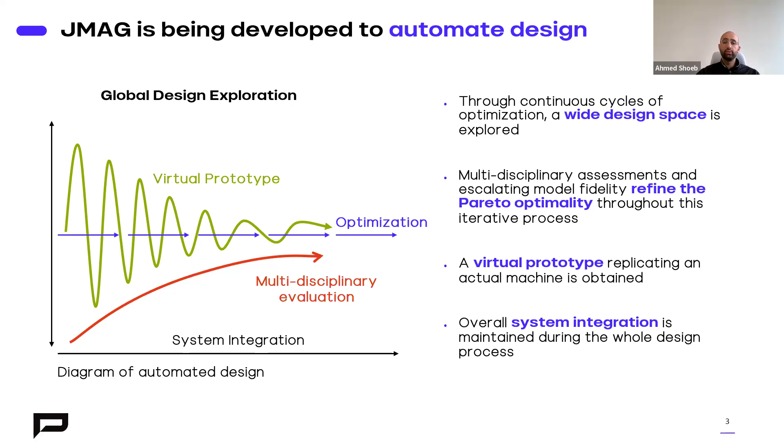So a quick agenda on our updates for this version. First, I'm going to go into global design exploration and optimization features. Then there's multidisciplinary evaluation, virtual prototyping, system integration, some new materials that we've added to our material database, and then in the very end, some related documentation.

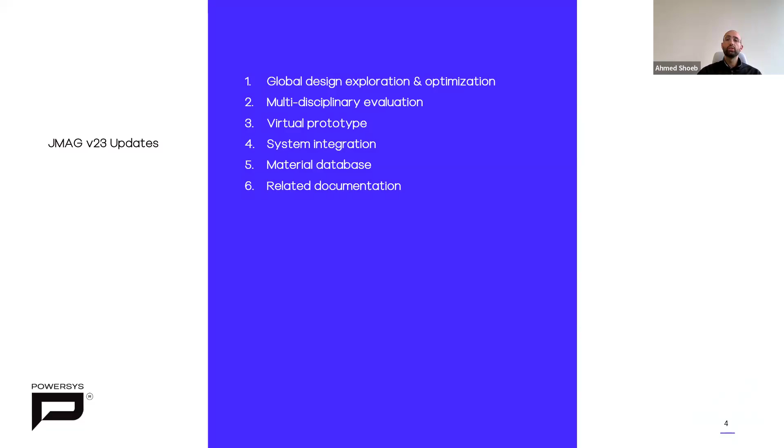All right, getting into it. First, we're going to discuss the distributed processing of parametric optimization. The idea here is that we're optimizing each case by itself, and that we're using a metric called distribution efficiency, which basically means how many cases are being distributed at the same time, and we're looking at the processing time per case.

Our goal here, let me add a laser pointer. Our goal here is basically to push each simulation as fast as possible from the right side to the left side. And we can see that that has already happened between version 22.2 and version 23. So the idea is that you're improving the distribution efficiency of each case so that 100 cases are calculated simultaneously.

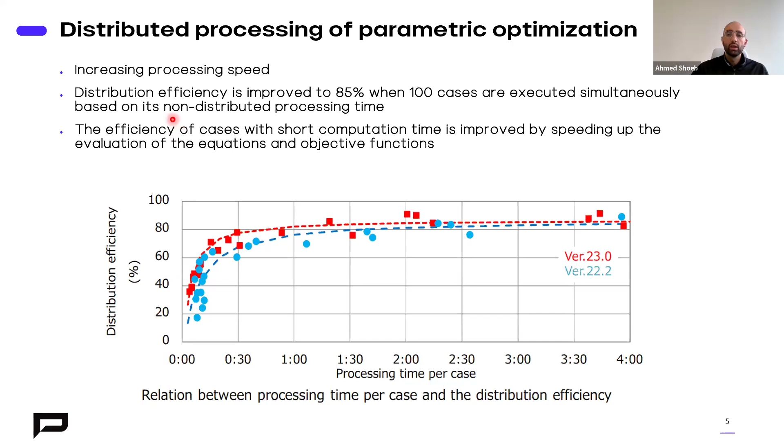Then moving on to the next feature, which was the parametric analysis with large number of simultaneous jobs. We've optimized the file input output. So there was a bottleneck in the disk loading, and that has been optimized for better performance. Ideally, of course, it's going to look like this, which doesn't happen. This is basically due to the Windows reading and writing.

And we've seen that between version 23 and version 22.2, there's a significant increase in speed, especially when the number of simultaneous cases increases. And this translates to up to 600 times speed up. So as you can see here, we're going into larger and larger number of cases, not just 10, 20, 30. We're looking at the 600, 800 range, 1,000 range at the same time.

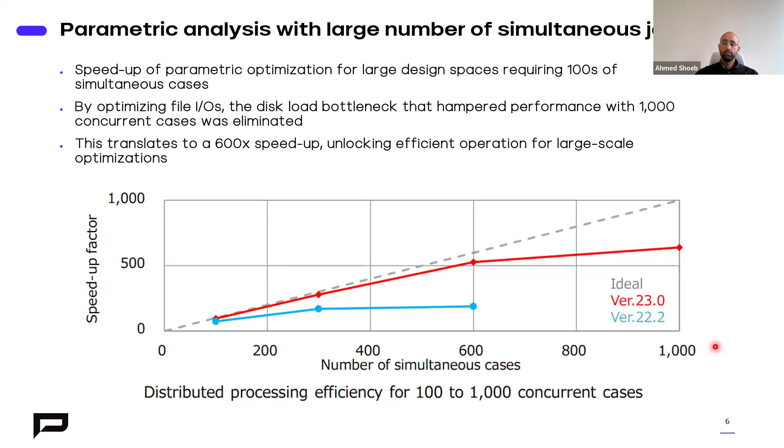Then for the magnetic field analysis solver, this has also been optimized with each version. This has been happening for several years now. For small scale models of 5,000 elements or less with 33 time steps, we're comparing the result of version 23 and version 22. And as you can see here through the graph, it's getting a bit faster.

The average computation time was reduced by 0.2 seconds, which of course doesn't sound that much. But when you take into account that you're calculating 100,000 cases, that number quickly adds up.

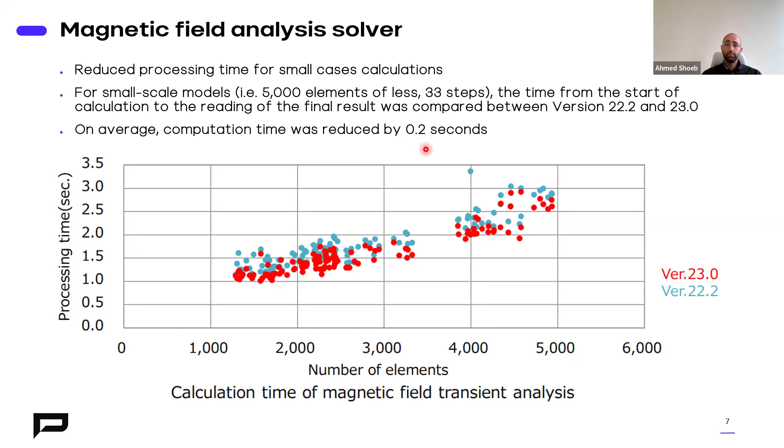Then we've also added optimization with a surrogate model, which basically what it does is that after several generations, it creates a surrogate model, and that sort of steers the direction of the optimization. So the idea of the surrogate model is to omit some of the FEA calculations. So in a 20 generation optimization, an FEA can be run every 4 generations instead of every generation, and that saves you a lot of time.

And as you can see here through this graph, the time in hours, if you're skipping every 2 generations, every 4 generations, you're seeing that the results are quite similar to each other. Every 10 generations might have been off a bit, so we stay at the 2 or 4 range. And if we don't skip, it's more than 4. It's, I think, around 5 hours over here. Here it's around 2.5 hours. And here it's less than 2 hours, or maybe 1.5 even.

So the surrogate model will help you, especially if you're thinking of going into 3D optimization. That will be your stepping stone.

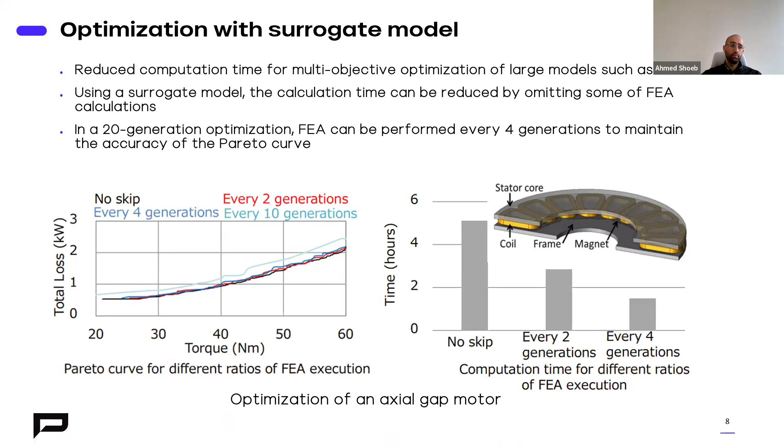And then JMAG-Express has also been a bit modified through the previous few versions. A lot of work has been done on JMAG-Express. It's been an extension to JMAG-Designer right now. It's complete FEA. It's not even analytic in any sense, but it's so fast because it uses very small meshes with a few number of time steps, just to calculate everything as accurately and as fast as possible.

And in this scenario, what is happening is that after running the machine characteristics design scenario, which is the efficiency map in Express, the cooling is also evaluated, and then additionally a torque ripple scenario is being added to increase the level of detail. And all of these will of course be added. These added scenarios would then be usable in Designer as well.

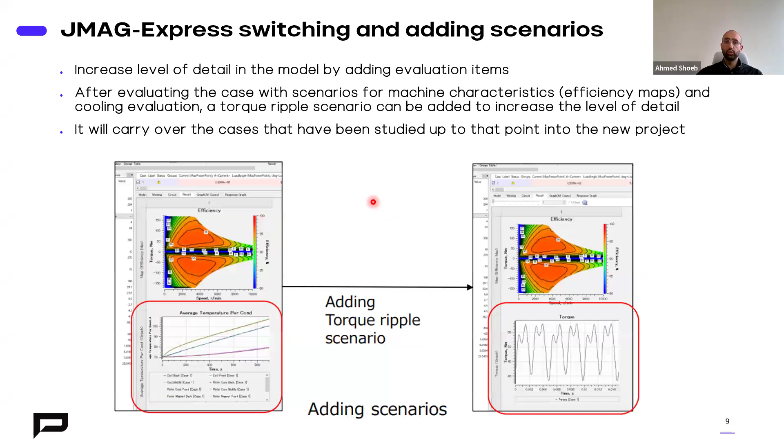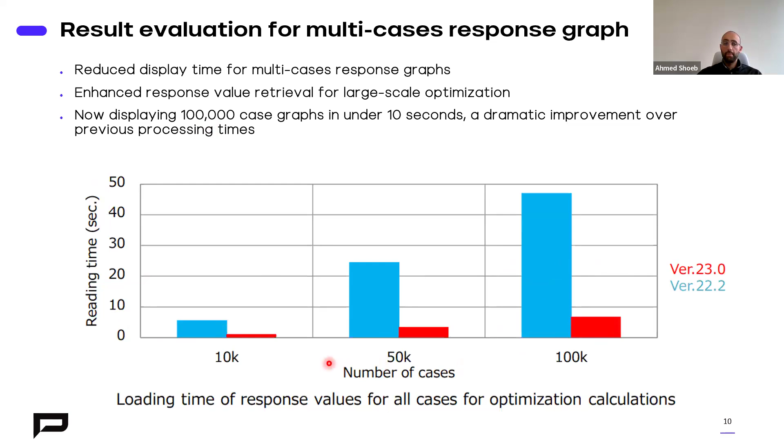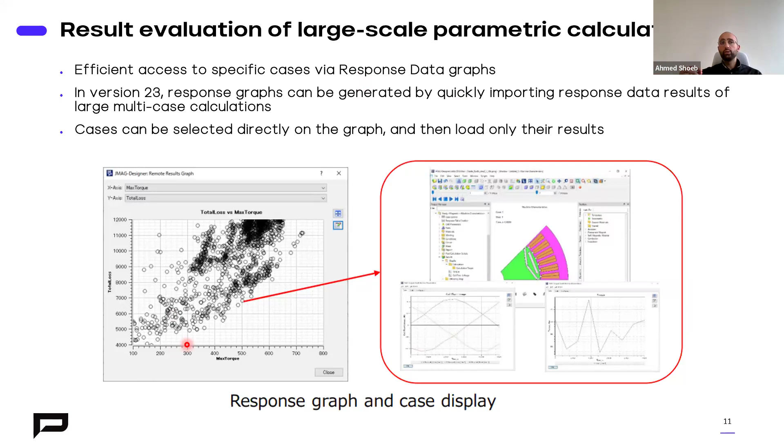Then also, this is applicable in Express, where you have an efficient access to response data graphs. Basically, instead of loading all the cases, you're just reading the response data and you're getting the table out of it, and you can then select the cases that you actually want to look at. Because of course, when you're doing this massive exploration, not all cases are of interest, but over time, you might hone in on the one you need.

And then this is a quality of life feature. It's the JMAG-Express scaling. Basically, if you set the gap type as fixed, when you're changing the size of the outer diameter, everything is going to scale with it. Previously, you would scale it and then your air gap would be like 10 millimeters. So if you keep the air gap fixed, JMAG is going to scale everything to that size.

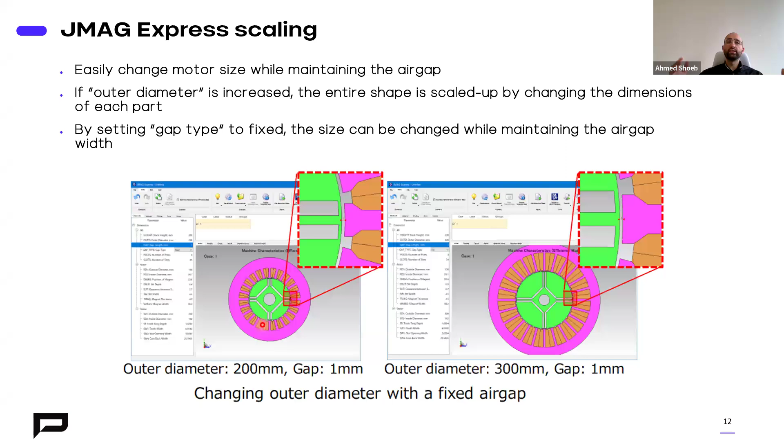And then moving on to the next topic, which is multidisciplinary evaluation. So version 23 expands the available scenarios, and machine topology is not just PMSM, there's induction motor, there's wound field synchronous machine as well. And it's been made easier to import DXF files as templates for JMAG-Express.

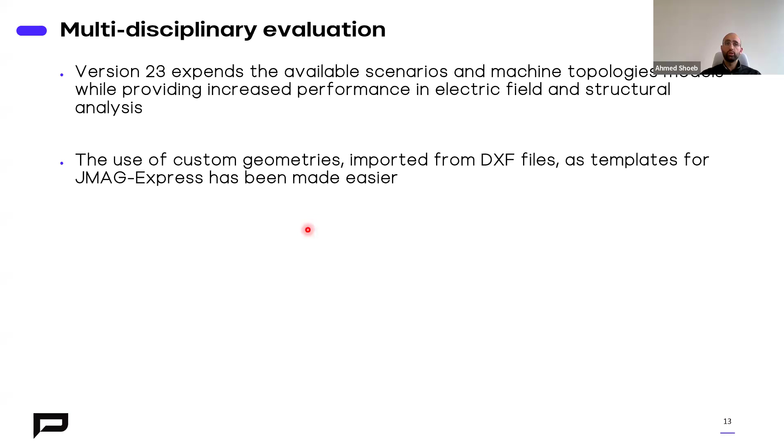So of course, we've added the wound field synchronous machine scenario, so you can evaluate the efficiency map, the thermal evaluation, and do a stress calculation as well. All these three scenarios are available for the wound field synchronous machine. In this scenario over here, we've noticed that the field coil temperature is too high, so we need to reevaluate our design. And this is the advantage of JMAG-Express, is that it can give you a very broad overview. Even if this is mechanically sound, it might not be thermally sound.

And even also if the efficiency map is what we are expecting, we need to evaluate all three scenarios at the same time, just so that we have a full picture of what is going to happen, and decrease the back and forth of, we've designed this, it's very structurally sound EM wise, but then thermally it does not meet our expectations or our criteria.

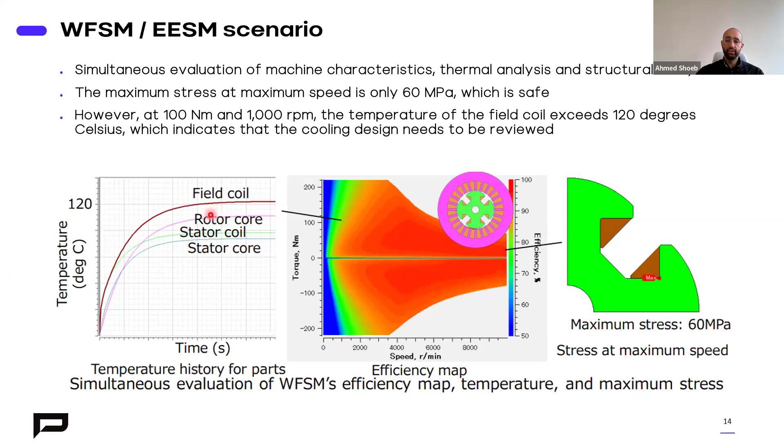Additionally, you can evaluate inductances in efficiency map, and these inductances can be used as response data, and that can be also set as an objective function or a constraint. So you can control the inductance of your machine, or optimize to a certain inductance value.

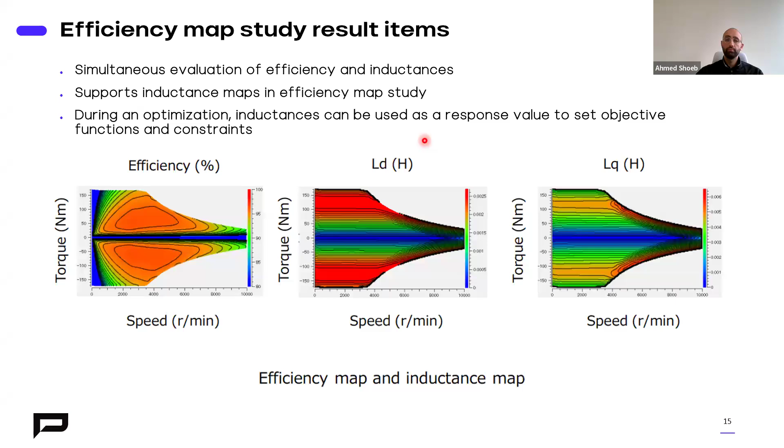And then we've increased the speed of the electric field analysis, where here we're evaluating cases with a large number of conductors. And basically, the time is reduced about 1 second between version 22 and 23. Again, this number does sound very small, but if we look at the grander scale of things, where we're mainly focusing on 100,000 simulations, 200,000 simulations, even more, each second adds up, and we're optimizing for that. And as you can see here, each version 23 has better results or has less processing time compared to version 22.

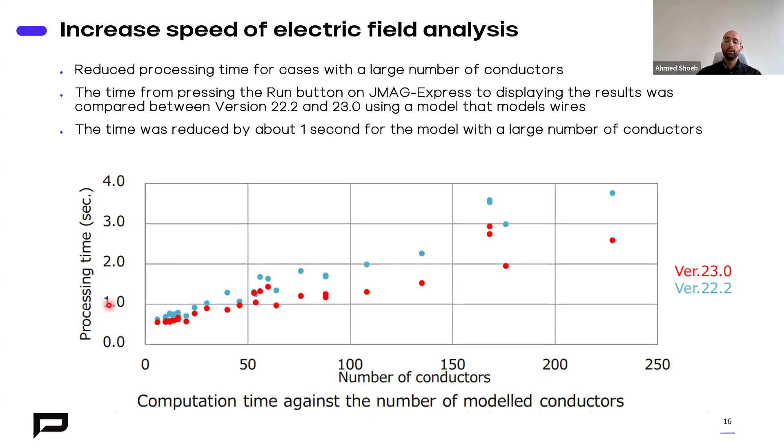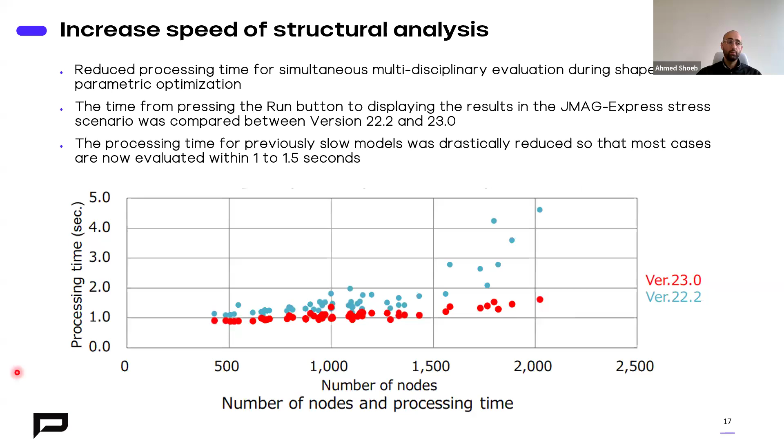And then we've added a feature where you can easily add your custom geometry as a template. You load the DXF file and you follow a setting guide. There's a tutorial for this, of course. And then you can use this geometry as a geometry template afterwards. And it can be used in JMAG-Express to evaluate the efficiency map, temperature increase, or the thermal scenario, and the stress scenario as well.

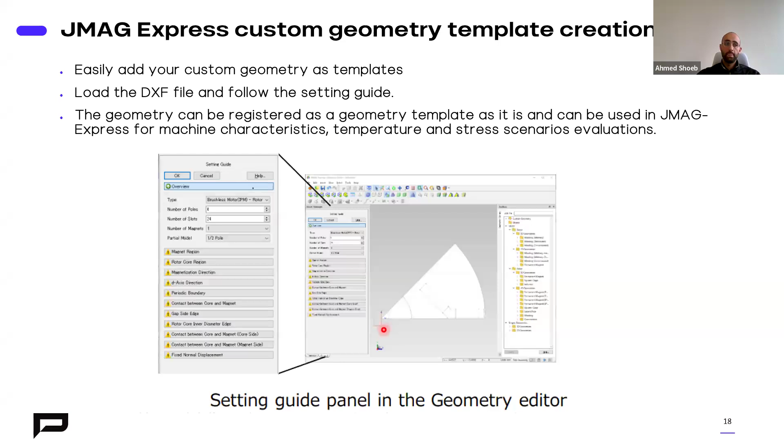Moving on to the next topic, which is virtual prototyping. So for virtual prototyping, we are expecting to handle very large, very detailed 3D models. And we're expecting the size of the models to significantly mirror what is happening in real life. So it might not just be the motor side of it, it can also be the casing to include all the leakage effects, all the stray losses that may happen.

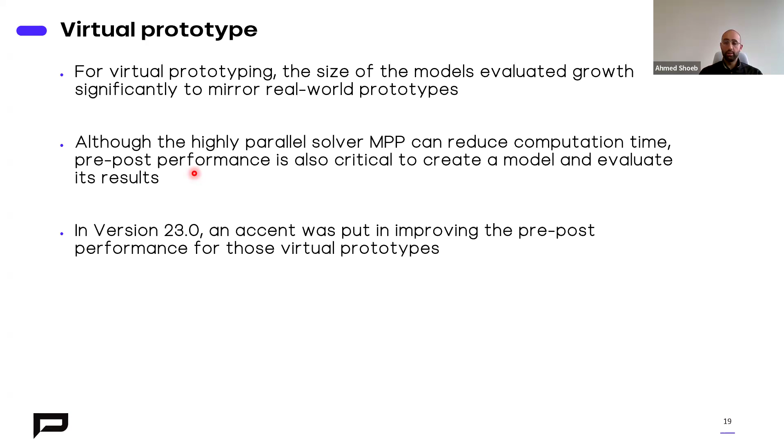Although the MPP solver can reduce your computation time, and as you might know, we can go up to 2048 cores in parallel at the same time for solving, there's also the problem of pre-processing and post-processing. So actually handling that model within JMAG. And we've noticed in some cases where even if the client wants to create a big model, sometimes the processing within JMAG is not helping him. And that has been improved in version 23.

If we look here, we have a graph of the number of million elements and the speed up factor. And basically what is happening is that there's a performance of models with 10 to 20 million elements, and the processing speed has been improved for improved usability. And the focus is on models with more than 10 million elements.

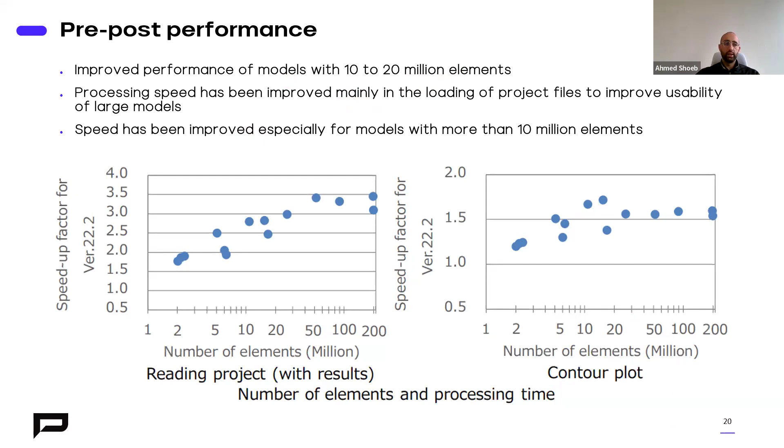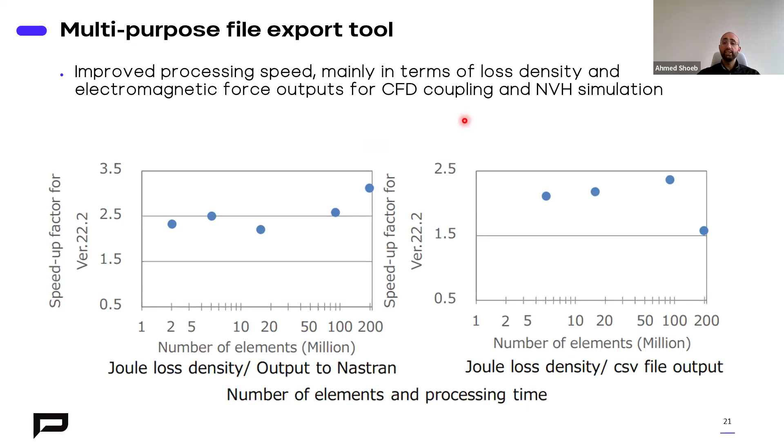Similarly, for the multi-purpose file export tool, we know that when you're outputting your files to a CFD software or for NVH simulation, you're usually using very big models. And for the multi-purpose file export, there have been improvements in speed for cases with large number of elements.

Then for our next topic, which is system integration. So maintaining system integration basically means that you have an early NVH estimate and a thermal assessment. So version 23 bridges that gap by adding NVH analysis as well as enabling that the data can be easily transferred to system-level simulation software such as Simulink or MATLAB, for example.

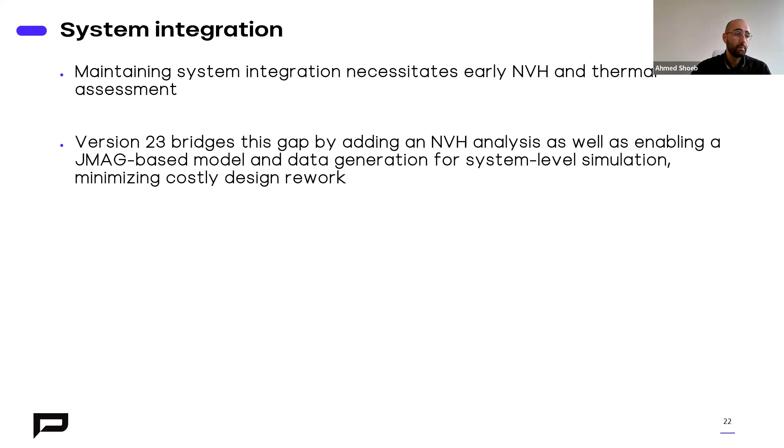So here, what is happening is that JMAG-Express can actually, you can resize the model or change the model, and that block, when it's fed into MATLAB, it can create like a direct link. And as you're evaluating your FEA models, those are also reflected into your control block over here.

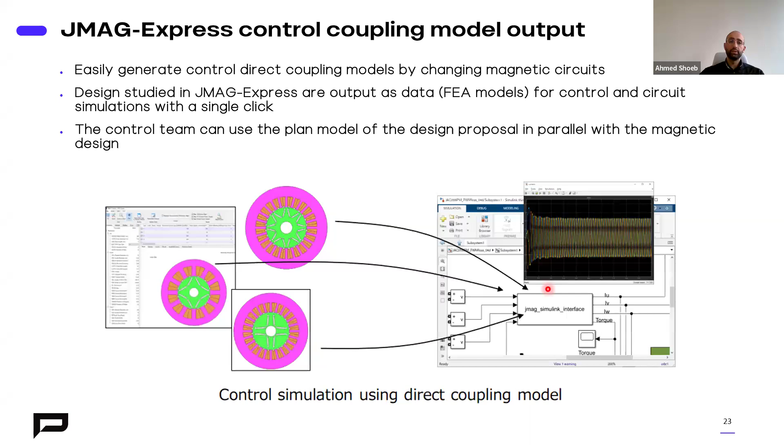So if you have a direct link between JMAG-Express and MATLAB or Simulink, you can evaluate not just the thermals, structural, thermal, and EM. You can also check your control side as well at the same time. And this is the idea of the whole system integration where everything is being evaluated at the same time at the very early phases.

And then as well, Express can output the forces on the teeth, for example, to a third-party NVH tool to enable co-evaluation of magnetic performance and NVH while studying the magnetic parameters of the motor.

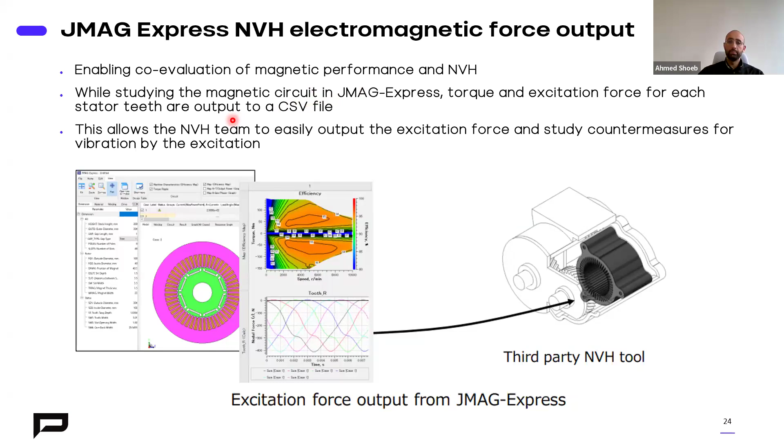And then, excuse me one second, just want to drink. Sorry.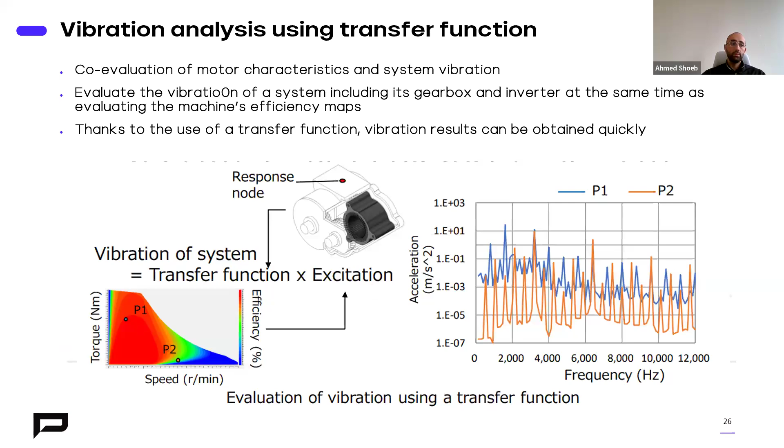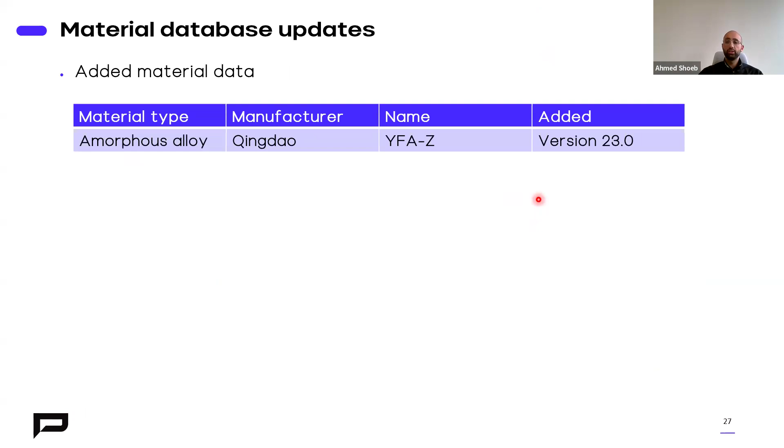Now, this is just going through the materials that have been added. So this amorphous alloy from Qingdao, I'm not going to try to pronounce this, has been added to the material database at version 23. Here are some of the supporting application catalogs and function tutorials that have been added with this version to sort of guide you through the new features.

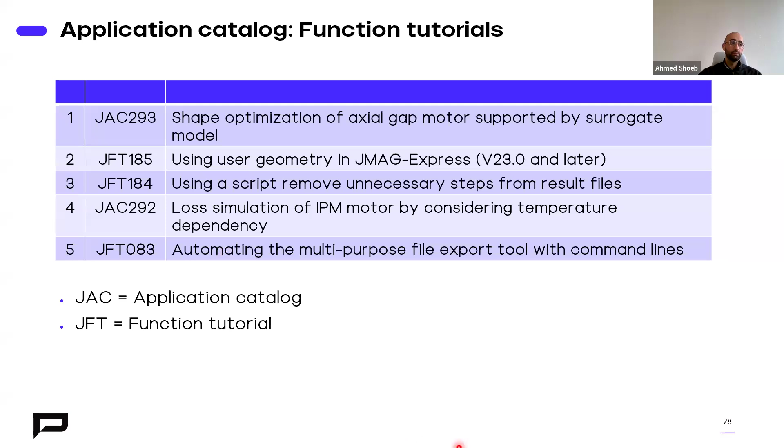Yeah, and Ahmed, there are a few in the Q&A, actually 2 that have been answered and 2 that are still open. Or it looks like actually just 1 that is still open, about estimating NVH for outer rotor motors using JMAG. Okay. I'll just go quickly through these questions so that everybody can listen to them.

Sure. The first question was, for the surrogate model and optimization, I need a starting data set so that the neural network works correctly. If I calculate 10 individuals per generation, and every 4 generations are calculated with a surrogate model, the neural network has only a data set of 30 individuals for this generation. Can I specify the first generation which I want to calculate, and then replace every 4th generation with a surrogate model? The answer basically is yes.

You can custom list the generations to be skipped, and it can be specified at different optimization steps. So it doesn't have to be at a particular generation where the skip is being done or where the surrogate model is being built. You can customize that as needed.

And then the second question, one user is simulating an axial machine with 8 poles, 12 slot concentrated winding from the geometry library. He is unable to set the winding phases A, B, and C in the slots. Oh, this is basically a support question. We can handle that later. Yeah, I do think there's a couple more generic questions on the open tab. Sure.